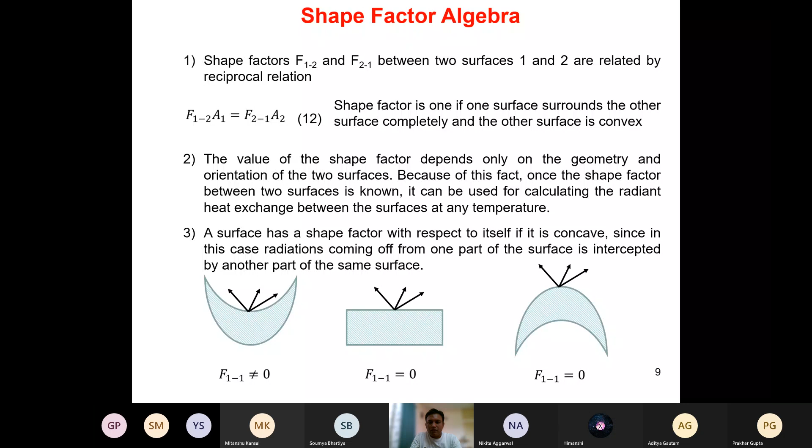Okay, so till the last class we started looking at the concept of a gray body. We started this chapter with the black body, saying that the black body has everything perfect: emissivity equals to 1, absorptivity equals to 1, no reflectivity, and it behaves ideally. So all the laws we have seen, like Planck's law, Wien's law, or Stefan-Boltzmann law, these are for ideal bodies. That means these are only for black bodies.

But when we look at real life systems, they do not behave like a black body. You can see that in a real life system we will have absorptivity and emissivity lower than 1. So in between these real bodies and the black bodies, there is a gray body.

These gray bodies do not have emissivity and absorptivity equal to 1, but they more or less behave like a black body. What I mean by that is the absorptivity and emissivity are independent of the wavelength. That is the most important part.

So how to deal with the gray bodies, that we started looking at in the last class, and the rationale behind saying that is the real bodies are more or less close to the gray bodies. Instead of saying that the real bodies are close to the black bodies, we should say that these are more close to the gray bodies.

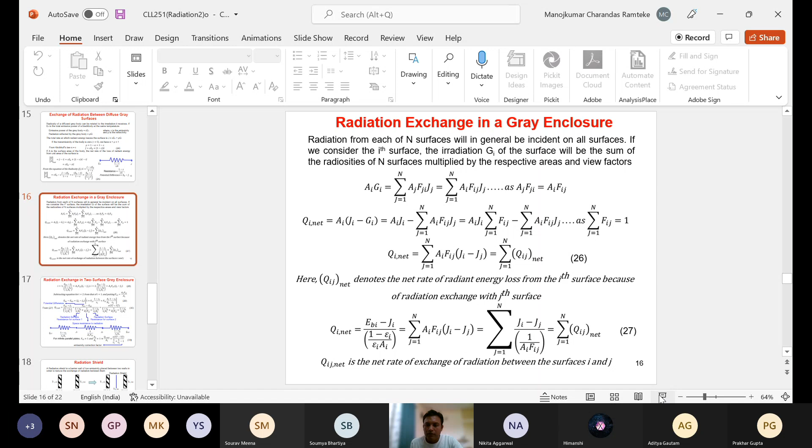Yes, sir. Hello? Hello? Yes, sir. Okay, all right. Yes, yes. My slides are visible or I lost? Visible. Hello? Visible? Visible, sir. Just a minute, let me make it full screen. Is it visible?

Yes, sir. Yes, sir. Okay. So now from this argument, what we can write here is AiGi. Why are we multiplying Ai here? Why are we multiplying Ai in both?

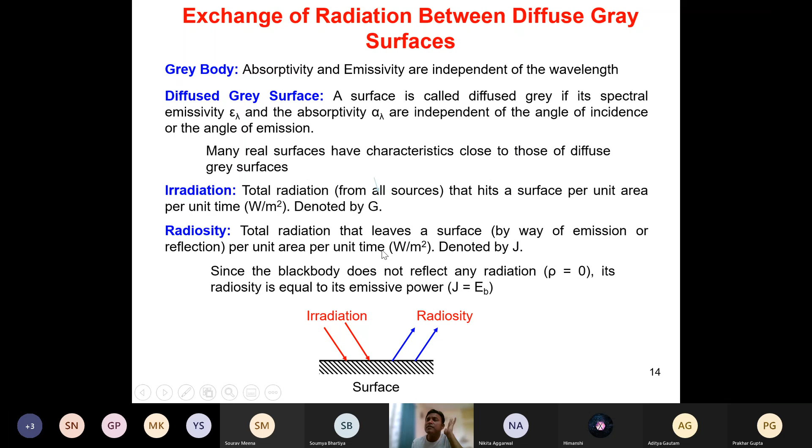Remember Gi and Ji, these are per unit area. If I go back here, see what we have defined. Irradiation is per unit area. Radiosity is also per unit area. So the total amount of heat given or received in the form of radiation, if I wanted to calculate, I have to multiply by area. That's why area is multiplied here. Do you all agree?

Yes or no? Yes, sir. Okay, all right.

Now Ai, in this case AiGi, is given as summation of J equals 1 to n, AjFjiJj. This is what we have obtained from the argument which we have given here.

Now what is the first property of the shape factor? AjFji will be given by AiFij, that is the reciprocal relation. Do you all agree? Yes, so we can replace AjFji as AiFij. We can replace it.

Okay, now this is the net amount of irradiation received by the ith surface. What we are interested in is calculating the net radiative heat loss from the ith surface. Now the net rate of heat loss from the ith surface is given by how much heat is going out in terms of radiosity minus how much heat I am receiving in terms of irradiation. That difference is nothing but the net radiative heat loss.

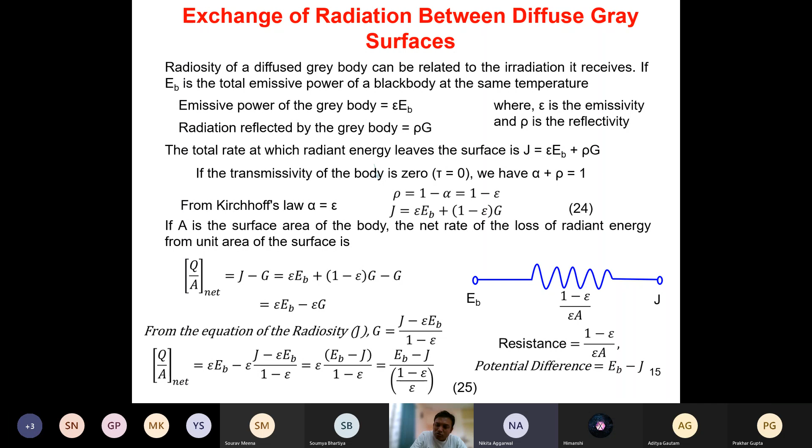Does it make sense? Yes, sir. So that's what we have written. Qi net is EBI minus Ji divided by 1 minus epsilon I divided by epsilon I AI.

Again, this second equation, this second part we can rearrange. We can take this AI Fij in the denominator, so that becomes 1 upon AI Fij. So we are representing this denominator term in terms of a resistance.

Now, two important things are coming into the picture. When I am changing from EBI to JI, I have a resistance term given by 1 minus epsilon I divided by epsilon I AI. That is the resistance term coming into the picture. But when I am changing from JI to JJ, another resistance term comes into the picture in the denominator, that is 1 upon AI Fij.

Now, this first resistance term, which is 1 minus EI divided by EI, we have called this first resistance term as surface resistance, isn't it? That's what we have called it. Do you all agree? Is it visible to everyone? Yes, sir, yes. So this particular term we have called as a surface resistance.

But what is this other resistance called as? This resistance is called as space resistance. Why are we calling this a space resistance? Because here this Fij factor is coming into the picture, and what is Fij? Fij is nothing but the shape factor or view factor. So how much part of the other surface I am able to view, that defines how much radiation comes into the particular surface. So this particular resistance is called a space resistance, and this is called a surface resistance.

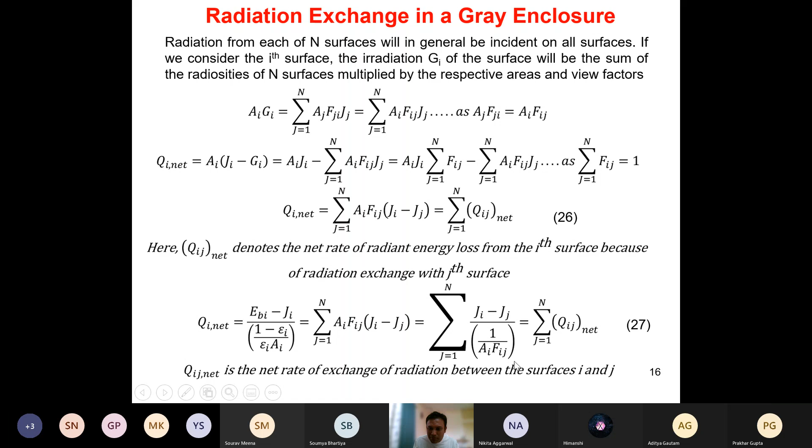So this is very interesting. We have started the concept of black body, but now we are moving to more realistic bodies. So this entire denominator term, you can write as effective emissivity. Remember, this entire denominator term, if I represent here A into epsilon overall, that will represent the overall emissivity.

Does it make sense? Yes or no? Hello? Does it make sense or not? I think students have lost here.

These are really interesting. You have to look at each of these terms in perspective. Don't look at these as equations. If you look at this from a conceptual point of view, you will appreciate how we have digressed from ideal black surfaces to gray surfaces.

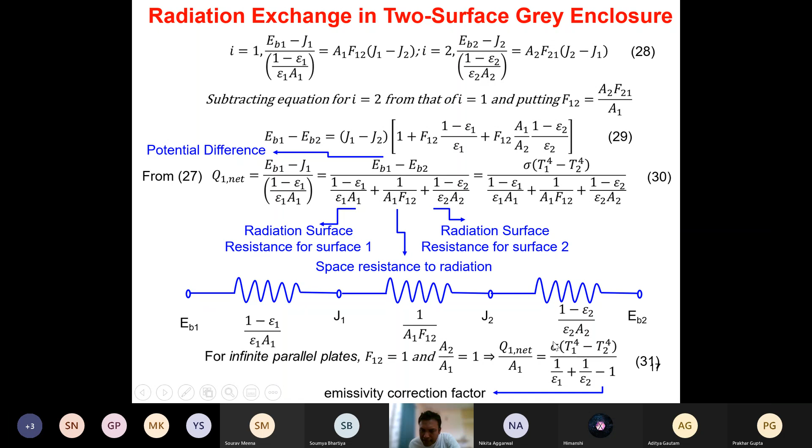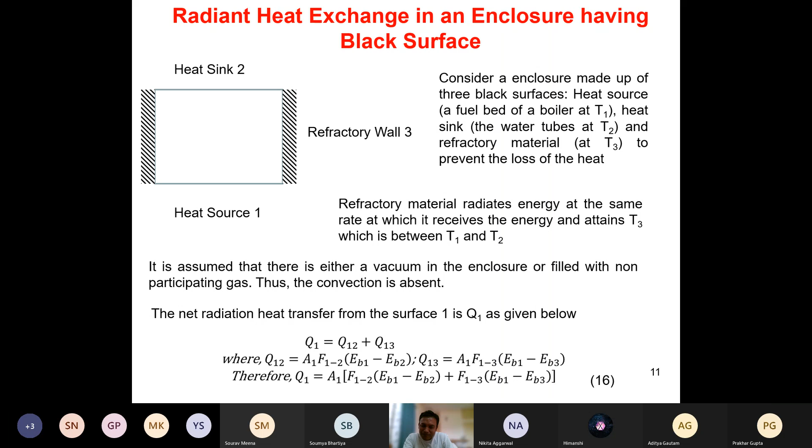This is something we have seen earlier also. Remember the refractory wall, whatever radiation it was receiving, the same it was emitting. Do you all agree, yes or no? Similar to that, not exactly the same, but similar, here also we assume that whatever radiation is received by the shield, the same amount, the radiosity, is transferred to wall 2. So the net radiative heat loss Q13 by A and Q32 by A are both the same.

If we equate these two equations, we can find the equilibrium temperature T3. Assuming a special case that the emissivity of all three surfaces are the same, epsilon 1 equals epsilon 2 equals epsilon 3, all equal to just epsilon, we get the equilibrium temperature T3 raised to power 4 as T1 raised to power 4 plus T2 raised to power 4, divided by 2, just by rearranging. If epsilon 1, epsilon 3 and epsilon 2 are all the same, we can equate the temperature differences and finally obtain this. Do you all agree, yes or no?

Yes sir. And if you put this T3 raised to power 4 into the original equation for Q13, ultimately you get Q13 net is half of Q12 net, whatever Q12 we obtained earlier, only half of that you get. So what we are concluding here is that just by adding a radiation shield with the same emissivity as surface 1 and surface 2, the radiative heat loss is reduced by 50%.

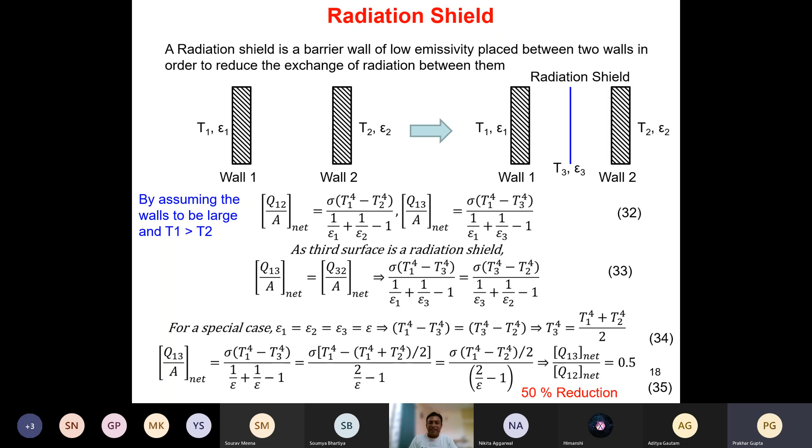Okay, so now there is the last concept of radiation. So far we started with conduction, then convection, then we looked at radiation. Now I am bringing a system in which all three are present: conduction, convection, and radiation.

Let's look at a conducting wall with a high temperature. Inner temperature is Ti, outer temperature is T0. The heat loss from this outer surface takes place by both radiation as well as convection. But within this wall, the heat transfer is taking place by conduction. So all three heat transfer modes are present here.

So I can write down the balance equation. Net heat conducted through this wall will be given by K by L, Ti minus T0. Do you all agree? Yes or no?

And that should be equal to the heat taken out by radiation as well as convection. So on the right hand side I will have two terms. The convection term will be given by Newton's law of cooling, which is nothing but H delta T.

Now delta T will be what here, outside? T0, which is nothing but the surface temperature, and the ambient temperature here is Ta. So H into T0 minus Ta is nothing but the heat loss by convection. Do you agree? Yes or no?

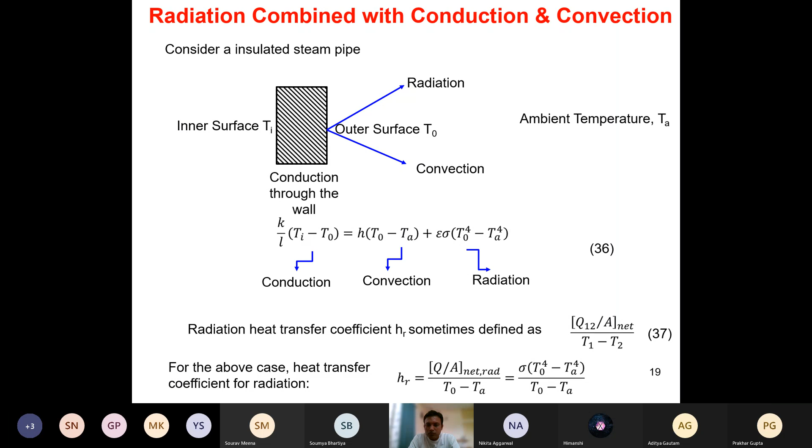Yes, so let's look at two problems to appreciate the concepts. Problem one: a carbon steel sphere of 0.3 meter in diameter at 800 Kelvin cools down by radiative heat loss to an ambient at 303 Kelvin. If other modes of heat loss are neglected, this is very important, other modes of heat loss are neglected, and if the ball and the ambient are assumed to be black.

When I'm saying assumed to be black, means what? Emissivity is 1, isn't it? So the additional factor which comes into the denominator otherwise is not there. Correct? Yes or no? So calculate the time required for the ball to cool down to 343 Kelvin. The density and specific heat of the carbon steel are 7801 kg per meter cube and specific heat is 0.473 kilojoule per kg per degree Celsius respectively.

This is a very simple problem. Similar problem we have seen for natural convection, similar problem we have seen for forced convection, and now the same problem we are seeing for radiation. The rationale behind using the same problem is to appreciate the same concept for three modes of heat transfer. Does it make sense? Similar problem we have already seen earlier. Does it make sense to everyone what I'm saying?

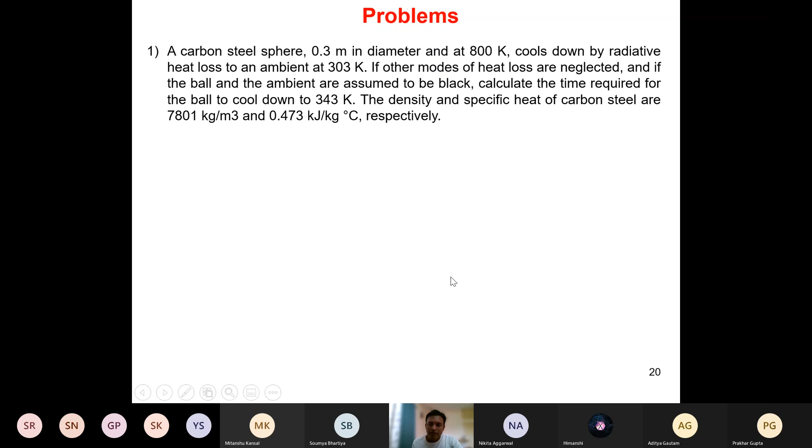F12 will be in this case just 1. You are absolutely correct, yes, F12 will be, because the ambience is there. Yes, you are absolutely correct, if you are saying it that way, it's perfectly all right. So that's what we have also written here, F12 is just 1, okay, all right, because all the radiation emitted by the sphere will be intercepted by the surrounding, that means its shape factor will be just 1.

Right, now what has been given here? This is the rate of radiation loss from the sphere, isn't it? And that loss by radiation will be reflected in terms of change in the internal energy of the sphere, yes or no? So at what rate the temperature of the sphere is decreasing, that is what decides how much radiation is going out. Correct. So M Cp d by dt of T will be same as the radiative heat loss, isn't it?

Correct. So that's what we have written here. M Cp dT by dt is nothing but the radiative heat loss Q12. So if we rearrange everything, M I can directly calculate since density is given and the diameter of the sphere is given. From the diameter we find the volume multiplied by density gives the mass of the sphere. Mass multiplied by Cp is already given, so mass into Cp I can take out, with dT1 by dt here. On the right hand side I'll have A1 F12 sigma T1 raised to power 4 minus T2 raised to power 4, and F12 is just 1, but area A1 I can calculate, that is 0.2827.

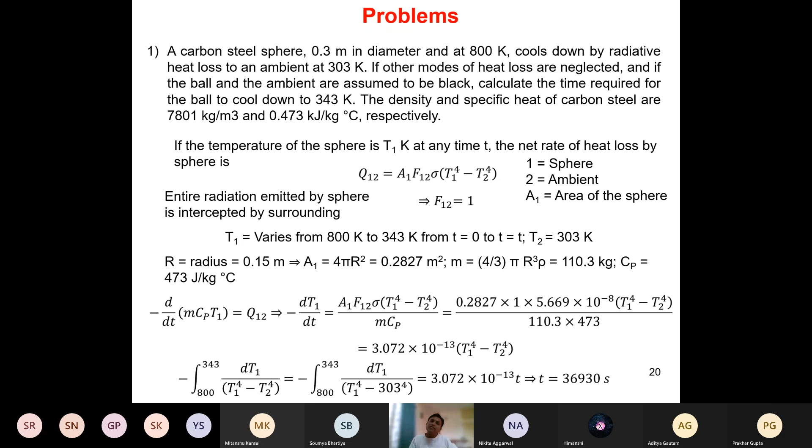Okay, now until now we are only looking at a black body. But what will happen if this black body is not black, but instead a gray body? And instead of a spherical surface present in the surrounding, let's say curved surfaces are there which have a shape factor with respect to itself, what will happen? Let's look at another problem on such a concept.

So we are having a gray body with emissivity of 0.6. We are not having a black body, we are having a gray body with emissivity 0.6. Shape factor 0.4 with respect to itself means what? F11 is just 0.4, do you agree? So what will be F12? Anybody? If I have F11 equals 0.4, what will be F12?

0.6. Why 0.6? Because that property, shape factor, F11 plus F12, and that summation goes all the way to F1n, that summation should equal 1. Since we are talking about only two bodies here, F11 plus F12 should equal 1. Since F11 is given as 0.4, F12 will be 0.6. Does it make sense to everyone?

Again, everything is given here. Mass is given, specific gravity is given, specific heat is given. The body is initially at 200 degrees Celsius, exposed to the environment at 30 degrees Celsius. We wanted to find the time required for the temperature to drop to 40 degrees Celsius, with the convective heat transfer coefficient given. Here not only radiation but also convection is taking place, so both convection and radiation are taking place. The heat transfer area is also given. So we wanted to find the time for decreasing the temperature from 473, that is 200 degrees Celsius, to 313, which is 40 degrees Celsius. That time we wanted to find.

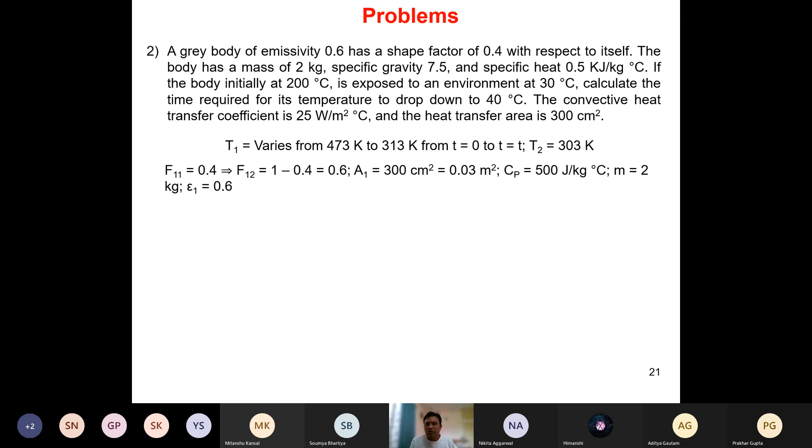Epsilon 2 will be 1, because the environment is vast, infinite, isn't it? So whatever goes into the environment gets completely absorbed. So its emissivity is 1. Whenever such a case is there and the emissivity is not mentioned for the environment, the big environment outside, of course if you have an enclosure the matter is different. But when we have an open environment, the way we are talking about here, in that case its emissivity is 1.

Okay, so this is the equation we have to use. Now this equation is different, isn't it? Remember earlier we used a different equation, but now we are talking about the gray body, so our expression has changed. Does it make sense to everyone?

So now this is the net radiative heat loss. In this case, I can put all the values here. Epsilon 2 is just 1, so 1 minus 1 is 0, so this last term gets cancelled out. So if I put all the values, only these two terms will be there in the denominator.

So if you put all these terms, only T1 is unknown here. T2 is the ambient temperature, so that we know. But T1 is changing, from 200 to 40 degrees Celsius. So this is changing from 473 to 313 Kelvin, isn't it? So at every time this T is going to change. That's why we have kept this as an unknown here.

Now this is the net radiative heat loss. Similarly, we will have a convective heat loss. So convective heat loss will be given by HA1 (T1 minus T2). Do we agree? Here also this T1 will be unknown. H we have already given as 25 watt per meter square, so 25 into area, area is what we have calculated, 0.03, into T1 minus 303.

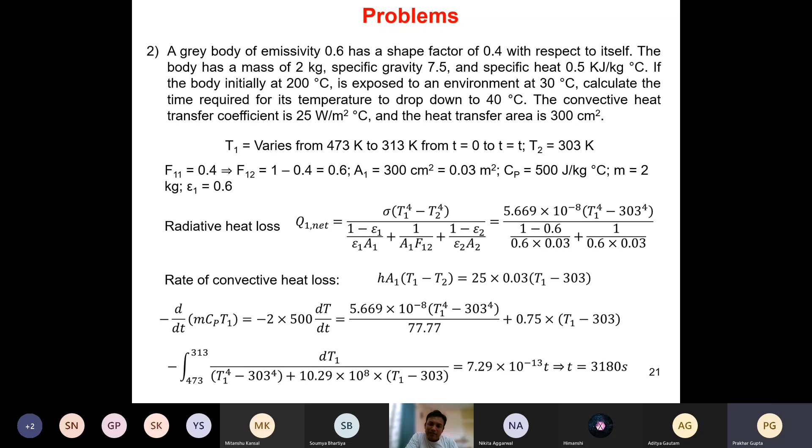Okay, so this is all about radiation. Let us move to the next chapter, which is nothing but heat transfer equipments. So let me share the file. We will do some preliminary things on that, and then we will discuss when we will be having a quiz and the classes. Let me share the other file without wasting any time.

So is it visible? This new slide, is it visible to everyone? Hello? Yes, sir, they are visible.

Okay, so far we have looked at, we started with conduction, convection, radiation, condensation. We have looked at boiling and condensation. And now let's look at heat exchangers. Heat exchangers are very important in process applications, because if you join a chemical industry, you will see heat exchangers, different types of heat exchangers. So designing of that, what are the different designs, which design is suitable for what, all these concepts we are going to look at in this particular chapter.

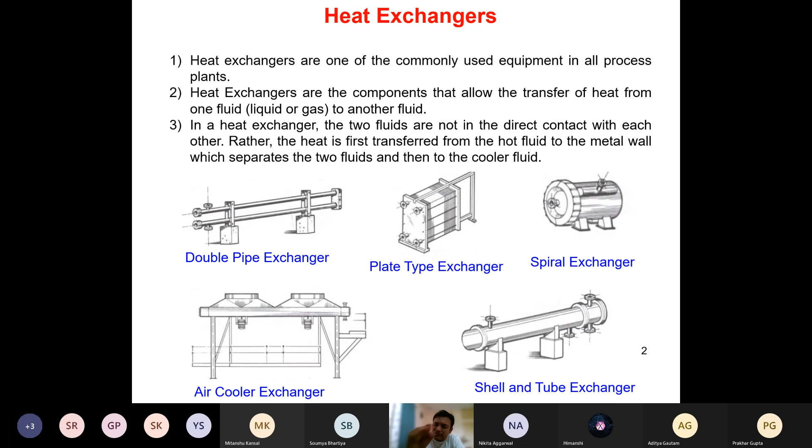So, double pipe heat exchanger. We will look at all these heat exchangers in a little more detail to appreciate the concept further. Double pipe heat exchanger has two concentric pipes. Here you can see an outer pipe, and inside that there is an inner pipe. One fluid flows through the inner pipe, coming in and going out. Another fluid comes in the annular region and goes out from there.

Sometimes, to increase the heat dissipation, the outside surface of this inside pipe is corrugated, or fins are added. Having more fins means more heat transfer area, which enables higher heat transfer. But at the same time, it also increases the chances of fouling.

That means there is an unwanted deposit that takes place on the surface. So the more corrugated the surface, the higher the fouling, and you will require more frequent cleaning of the inner tube. Is it clear to everyone what I'm saying?

No, sir. Sir, can you repeat? So if we add fins here, let's say, what will happen? There may be accumulation of some deposits. There will be accumulation, but at the same time there will be more heat transfer also, isn't it? By adding fins, yes, you are increasing the heat transfer area. Does it make sense?

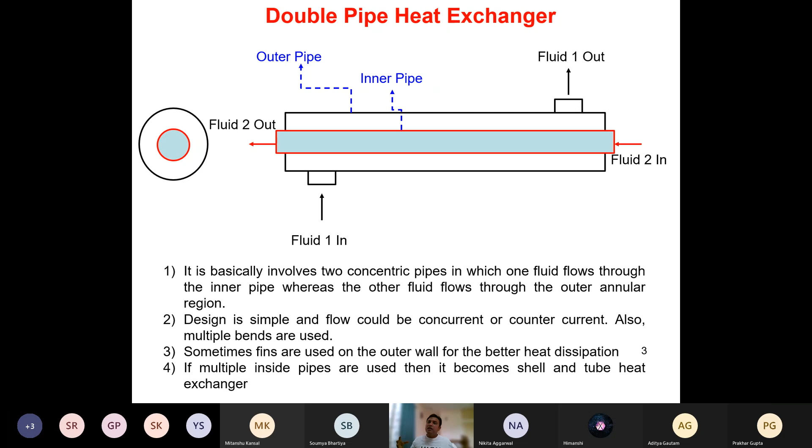So now, this generalized version of the double pipe heat exchanger is nothing but the shell and tube heat exchanger. It has multiple tubes inside one big shell. That we will look at here. So this is a shell and tube heat exchanger.

Here, for simplicity, I have shown only 4 tubes: 1, 2, 3, 4. These 4 tubes are present inside a bigger size tube which is called a shell. One fluid is coming in here, the shell side fluid, and it follows a tortuous path like this because there are baffles in between, isn't it? And this fluid comes out here.

Another fluid comes in here through this cover type head. It flows through these 2 tubes and comes out from these other 2 tubes. This type of arrangement is called one shell side pass and 2 tube side passes. The fluid on the tube side goes twice, changing direction like this. So there are 2 tube side passes and 1 shell side pass, going this way and coming back like this.

So these blue pipes are the boundary, like the wall of the pipe. These blue pipes you are saying? No, sir, the horizontal ones. The horizontal ones, these blue pipes, are not the boundary. One fluid is flowing through this. This fluid is coming in here. Just a minute, I will explain. So one fluid is flowing through this.

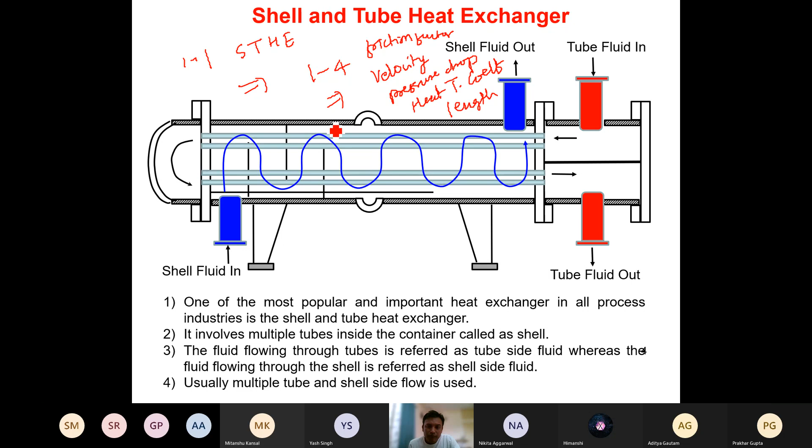Is it clear to everyone? Makes sense to everyone? Yes, sir. Okay.